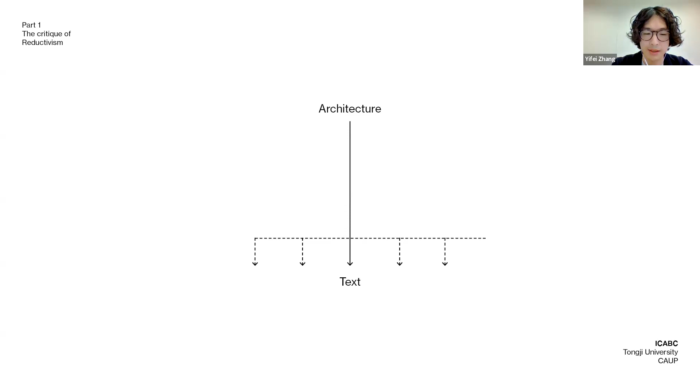If architecture can critique, such criticism must not come only from reading. The emphasis on reading is perhaps symptomatic of we as designers' temptation to explain. Buildings are firstly to be lived rather than to be read, and reading or a prescribed meaning are more than likely the didactic narrative of design, the declared intention. A text demands a writer, and thus to read is to be at least distracted by the master narrative, reducing buildings as footnotes to theories.

This discovery of the insufficiency of biotechnical determinism can be understood as more than just a simple critique of modernism, but a wider critique of textual reductions. Like functionalism cannot lead to a singular design, declared intentions of all kinds—whether formal autonomy, sustainability, or functionalism—cannot singularly account for a built project. The interpreted textual meanings cannot exhaust the totality of the building.

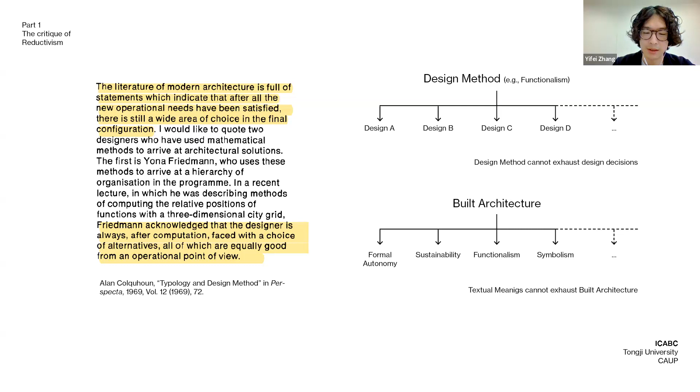Architecture is not only a representation of these ideas. There's always something beyond these declared intentions, and it's particularly what is beyond architecture's message that I argue architecture has proper agency to formulate criticism. The gap between the entirety of architecture and that of its various textual manifestations is where the building, supposedly a mere physical object, serves its agency as built form.

Architecture is condition, but also conditions. So in my presentation, as well as my paper, I explore a form of architecture as criticism that breaks away from the process of reading and focuses on scrutinizing architecture's outward manifestation of power toward its users rather than inculcating architectural literacy inwardly for its readers.

This approach moves away from projecting the designer's intention onto our perception of a building or analysis of drawings, and focuses on the building's effect in shaping its user's life and habit. It is this emphasis on exteriority, on effect, and on the outward manifestation that the stance of this paper is pragmatic.

From this pragmatic understanding of architecture derives my definition of a pragmatic criticism by architecture. To me, architecture can only work as criticism. A building is critical only when it critiques, when it actively renders its object of criticism improper. The power of architecture as criticism thus differs from textual criticism expressed by its author. Textual criticism is the representation of the architect, yet in a pragmatic criticism, the building asserts its own agency.

If the building creates a better quality of life, we can say it is a critique of history, which makes the condition of living prior to its completion improper. Similarly, we can say a built building can critique a type by acting as a parody or an exemplar. And if a building renders the exterior uninhabitable, it can be regarded as a critique of climate or environment. In fact, I will argue a majority of buildings would qualify as this critique.

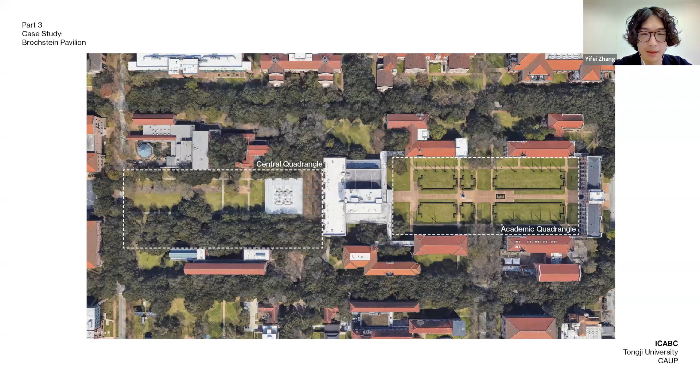Already from this satellite view, you can see the academic quadrangle is poorly shaded and has these kind of formulaic French gardens, while the central quadrangle on the left is populated by trees, and the square you see is the pavilion in the middle. In the scorching sun, there is no shade other than shadows of monuments, architectural or statuesque. The academic quad admonishes loitering and demands veneration—and if you know Houston, it's almost 40 degrees here during the summer.

In the academic quad, the division between solid and void is absolute. The academic quad is picture perfect. It can be appreciated only by its instantaneous visual power, recreated infinitely by promotional materials. The behavior fostered by this academic quad is its popularity among Houstonians photographing for weddings, engagements, and quinceañeras.

The total transparency of Brochstein and its generous canopy blurs the line between the interior and exterior, dissolving architecture's solidity within a leafy landscape. In addition to its glass cladding, the brightness is carried indoors through the angled skylights and the perforated ceiling. Its openness can also be felt in its accessibility. Brochstein's transparency recalls Farnsworth House or the Glass House by Philip Johnson, but it sits on no podium and can be accessed from all four sides.

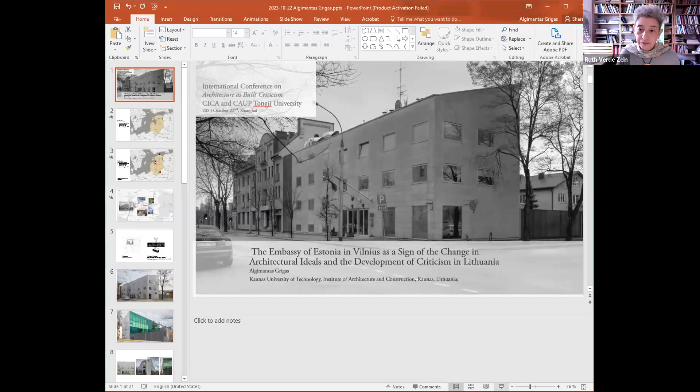Yes. Hello, everybody. I hope you can hear me well and you can see the presentation in full screen.

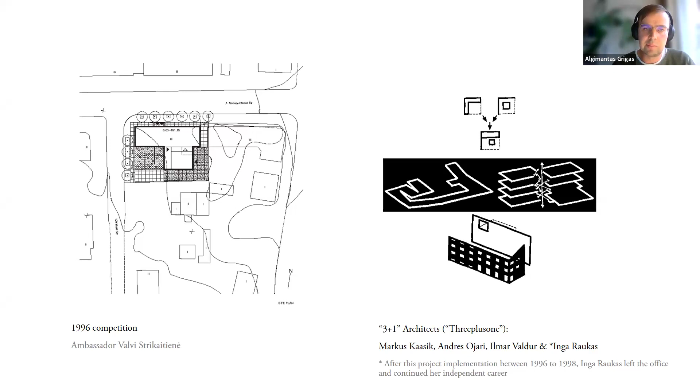The front of the building is decorated in limestone, typical Estonian Ungru stone, which is declared a national stone, lightly painted in light blue by impregnation material. And in the back, we see the first frameless glass wall in the Baltic states.

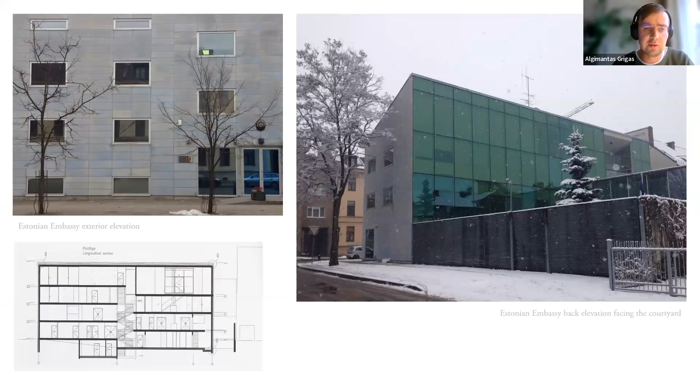A number of technological innovations have been introduced in this building. Here you can see the comparison of the section of the building, which shows the innovative proposal by the architects to design a building without corridors, where each level represents a different space, and the shift in the half floor allows this smart layout of the building.

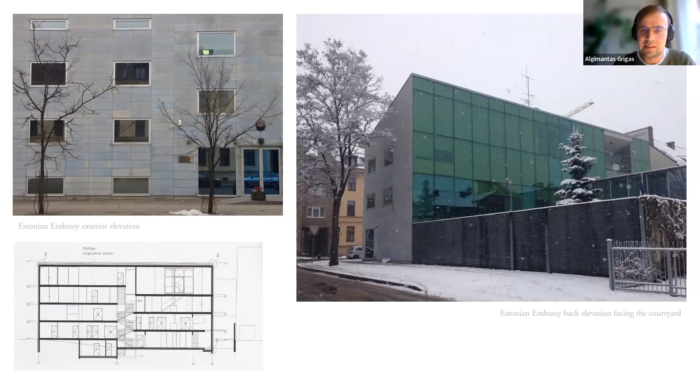On the right side, you can see a picture with some snow. As you may know, black and white are part of the Estonian national flag, so this play with the colors is imminent here.

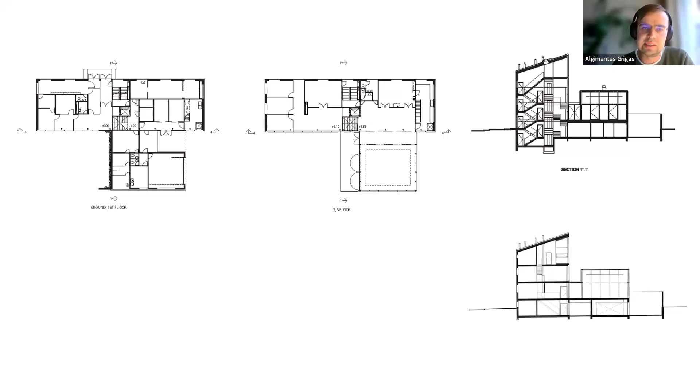With the views of this room, I will end the presentation. And this is the building again from the exterior.

It does not look too old, as Estonian architecture historian Mart Kalm, when he visited the building at a 2010 conference in Vilnius, noted that the building is aging very well. There are not many things that have been changed, and it functions exactly the same way as the architects intended in the beginning.

There was some criticism for the building, of course, like this open balcony you can see in the back elevation. It was covered with a metal curtain, which caused too much noise, and it had to be removed. Also, the big frameless glass wall had to be additionally glued with a sunproof sticker, because during construction, cost saving had been implemented by a political decision, and the wrong type of glass had been used for the back elevation.

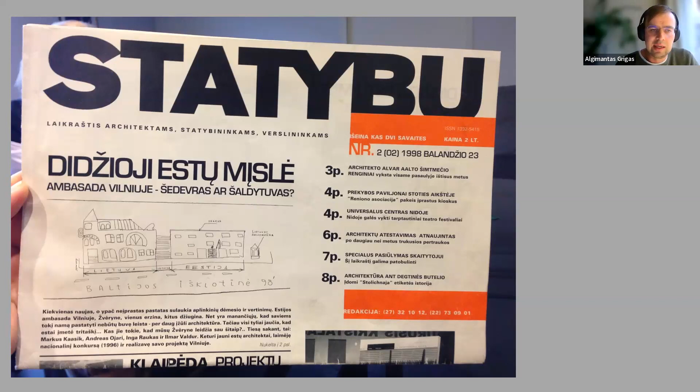caricature of the Estonian embassy with the neighboring building. If we look more closely, we can see that, by an unknown architect, the caricature sums up the story of architecture in the last decade of the 20th century in the Baltic states. We can see Lithuania on the left side, Latvia in the middle, and Estonia as a super modern and striking modern building. Below we have another variation of the caricature, showing the Lithuanians lining up for visas to 'modern European architecture,' as it says.

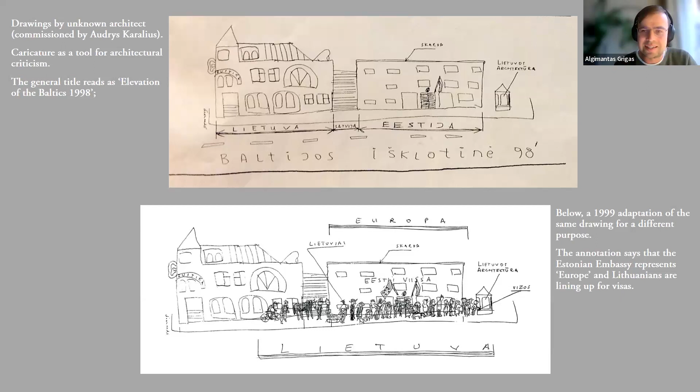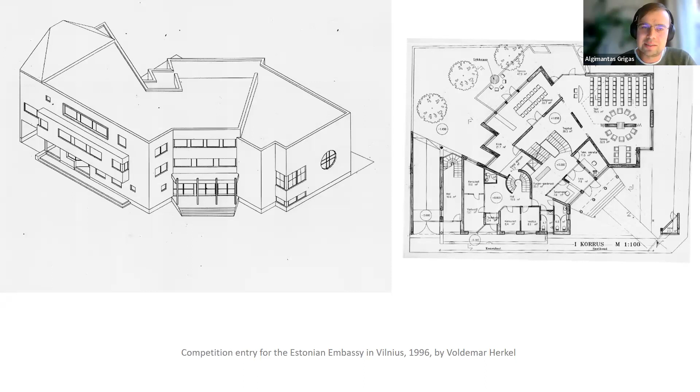But it's really helping me to explain the situation, as these two buildings were built at the same time in completely different styles. When the Estonian embassy appeared, there were many articles in Lithuania with furious titles like 'The Fridge' or 'A Prison', or 'Beasts on 2 feet are destroying the Žvėrynas neighborhood'. But also in Estonian context, this is another entry to the Estonian embassy proposal, a very postmodernist one.

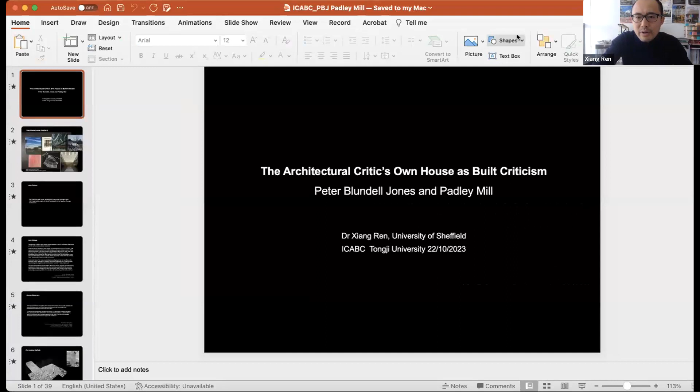Peter Blundell Jones is a prominent British architecture critic and academic. He died early at 67, but in his long teaching career spanning 40 years, including 22 years as professor at Sheffield, he wrote about 15 books, not counting foreign editions, and nearly 600 articles published in 47 journals spread over 13 countries.

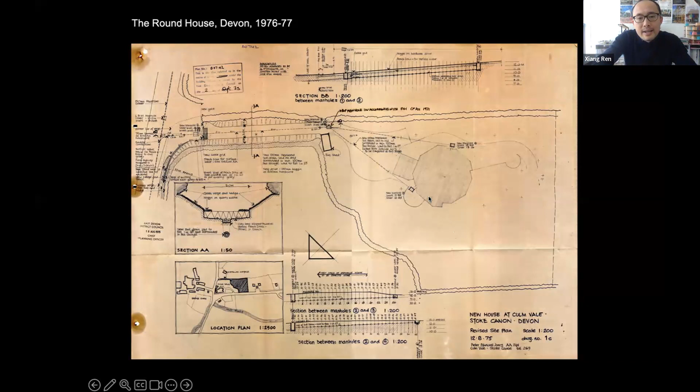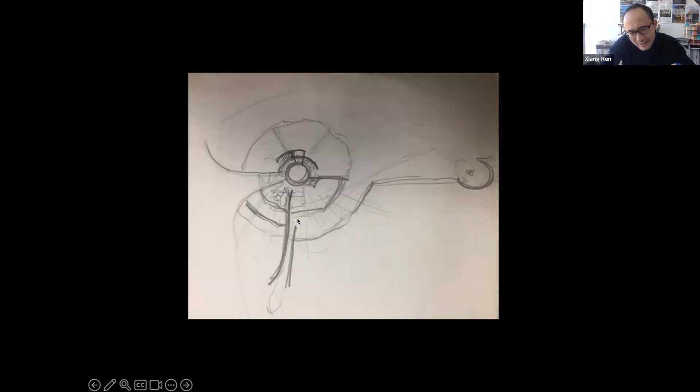You can also see this idea of extended walls into the garden, into the nature, with semi-enclosed, semi-public space here and there—some for car parks, some for the garden, some for channels and the ramp around—and they all come together, blurring the boundary between interior and exterior.

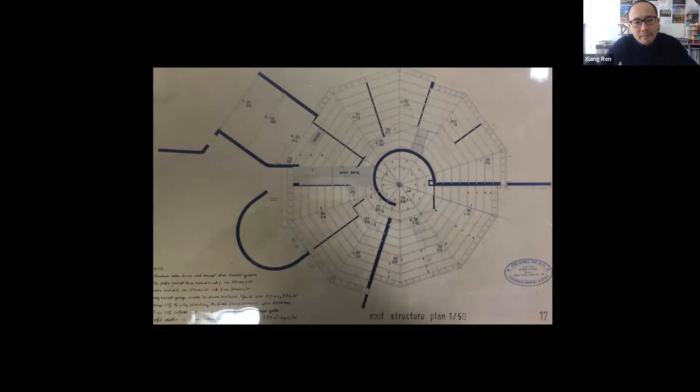It is built and flexible, I believe. He participated in the construction himself, always working with the masons and subcontractors, and kept the cost very, very low at that time. I think the full cost of this project was only 30K at the time.

As built, you can see very lightly, gently curved partition walls, expanding the building into the external, but also always having a window frame bringing the view from inside to outside, articulated at different levels of the roof, bringing daylight from the top and the high side.

This is the main space of arrival, channeling you into a central welcoming space. This is the heart, the hearth of the family life, with the fireplace built into this wall, and the long built-in sofas alongside—always in a circular and organic relationship with the objects.

You can see the roof ceilings, exposed structures that remind of the works of Aalto in the town hall. Always these different ideas and languages are being synthesized and reconciled on this specific site for the specific clients, by Peter Blundell Jones.

This is his very first ever built project, and it won some small awards and was published in a building design magazine in 1977, a year after its completion. You can see that it's inspired by Hans Scharoun, and it's one of the circular houses in the country at that time.

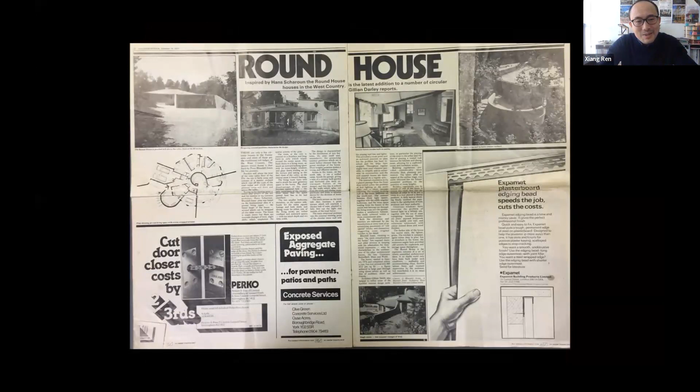So the central idea of the family house, centered by a fireplace but also the hearth, the living room as a core to organize the ritual of daily life.

This is the fundamental methodology and thinking Peter Blundell Jones translated twenty years later near Sheffield, in a small village called Grindleford, where he bought a decayed 18th century industrial mill from auction and reused it into his family house, which he lived in until this year with his family.

This is the site from the ordnance survey, and these are the moments and as-found objects from the site. That is the house from a distance. By the way, this is a conservation area, and the house is a listed building.

So lots of the interventions are happening inside.

Excuse me, one minute please. Sorry, excuse me, one minute please. All right, no problem, I will be very quick. Yes, it's all very general.

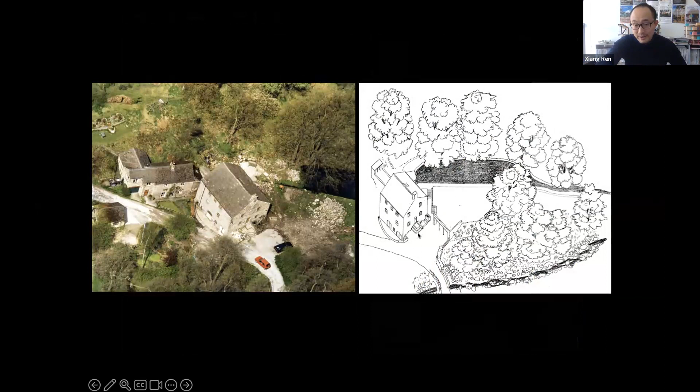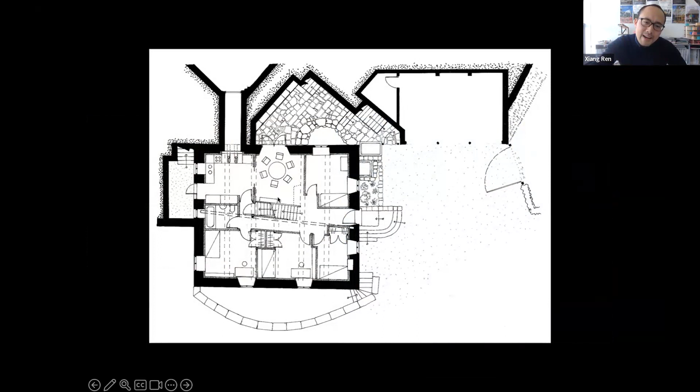And the plan—you can see a spiraling screw of stairs leading centrally to the living room and the kitchen, which is a key idea of the plan layout. Here you can see a new steel structure intervention into the existing shell.

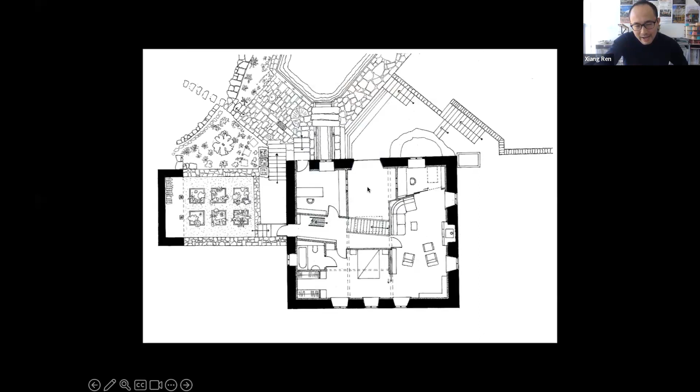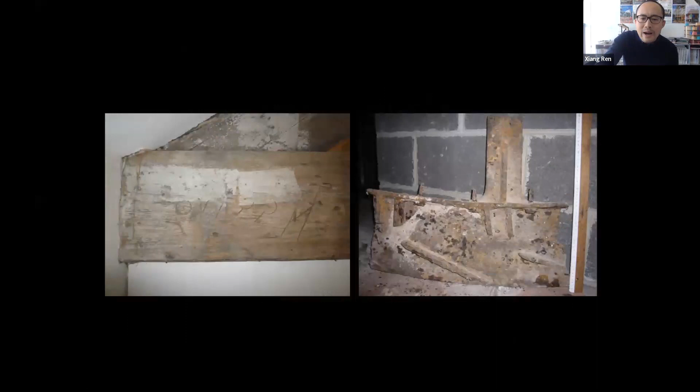These detailings are seen a lot in Scandinavian traditions too. So I want to finish with these slides, a little bit in a rush, on the home and the wall and the built criticism, following his idea of architecture and rituals: that architecture provides a mirror that reflects our world and our knowledge about it, and it's the way we interact with it.

And in David Lee's obituary for Peter Blundell-Jones, I think that is his feeling, but also a lot of our feelings: that the threads of life connecting me to a bright, optimist view of the world in which architecture as an outward form of a well-ordered society could make a profound and positive difference to people's lives are being cut one by one. Hopefully this clarity of vision from Peter Blundell-Jones can all continue as a collective legacy. Thank you very much.

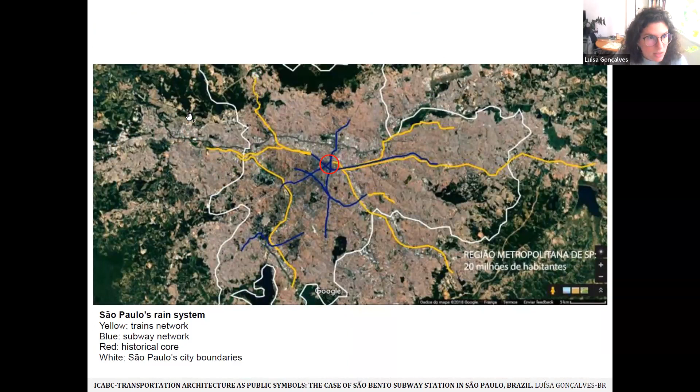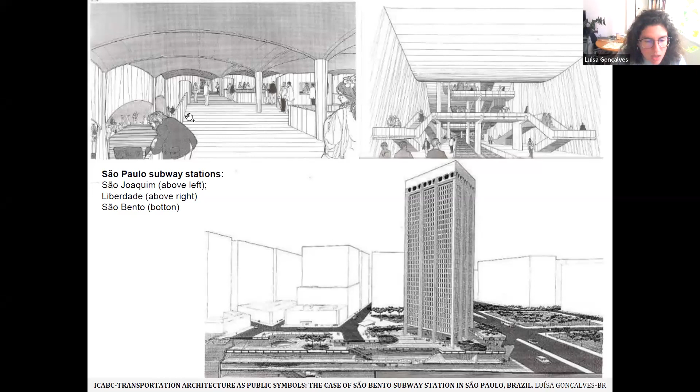Subway stations are primarily designed for their functional aspects as transportation nodes. They gather a large number of people passing by, especially in connection stations and intermodal terminals. They also present numerous interesting opportunities, defining places for public encounters and further city engagement, as is the case of the São Bento station, located in the historical core of the city of São Paulo in Brazil. The station design was the responsibility of architect Marcelo Fragelli and his team, developed when designing the very first subway line in Brazil. It has been considered a significant modern and brutalist architectural landmark for its historical and cultural value.

Fragelli's work presents several aspects that point to architecture as built criticism. That happens by turning the stations not only into places for transit, but into public spaces, some of them configuring major squares. Fragelli and his team opened the stations from its interior out, frequently bringing natural light to the underground spaces, integrating gardens and fixed furniture, allowing people a more pleasant and metropolitan spatial experience. Line 1 Blue stations are also statements encouraging a deeper appreciation of the potential of transportation architecture to shape the public realm and foster critical conversations about the built environment's role in society.

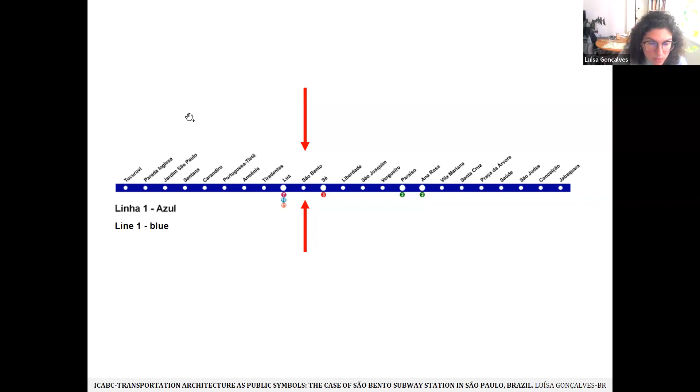São Bento station is in the middle point of Line 1 Blue of the São Paulo metro system. It is located near several important foundational landmarks, such as a valley called Anhangabaú, an indigenous name for the small river that crossed that area, also the São Bento Monastery, and a major square called Sé, which refers to the Catholic Archbishopric, in the central area of São Paulo.

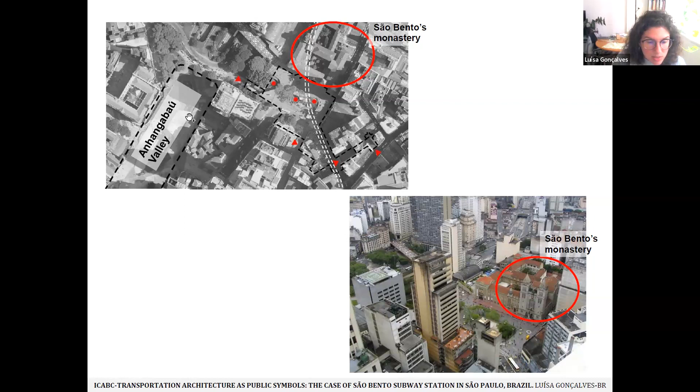It is one of the 23 stations of Line 1 Blue, and an estimated 40,000 people use its premises at rush hour. In the 1980s, it hosted the city's initial slam and hip-hop gathering until the movement outgrew the space and moved to bigger ones. In 2019, the subway company licensed the station to a shopping mall company called Patio to establish a commercial area inside it, a future that was already planned by its initial design.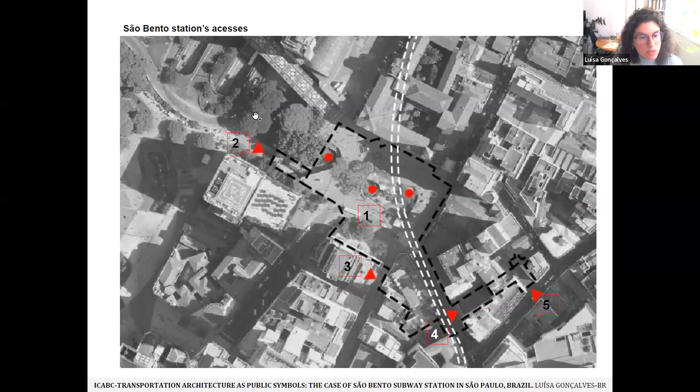Despite serving only one metro line, the station has 5 different accesses due to its unique position in the city. The foundational core of the city is over a small triangular hill, surrounded and limited by 3 valleys, where each corner corresponds to a different religious order premises: the Benedictines, the Franciscans, and the Jesuits. Even though São Bento Station's main entrance is in the plaza in front of the Benedictines monastery, it may be discreetly accessed by the surrounding streets. Every entrance is at a different topographical level, giving the station a particular characteristic of being a possible pedestrian shortcut connection through the irregular and steep immediate surroundings.

The main plaza access is a large multi-level square defining a significant excavated architectural space surrounded by a perimeter wall that may be used as a balcony to look below, revealing the metro entrance, and creating a sunken plaza surrounded by small shops and cafes.

All the architectural elements were carefully designed. The main stairs define a monumental spiral in dialogue with round-shaped gardens, offering the passing public a gradual transition between the upper street level and the underground station.

The sunken plaza solution allows its monumentality without visually competing with the surrounding historic monuments. Also, it is organized in plateaus filled with gorgeous benches and different opportunities to sit and enjoy the place, the small bars and other commercial establishments.

After the plaza, we find the standard architecture of the subway, with signalization conducting the public to the ticket offices, stairs, escalators, trains, and rails.

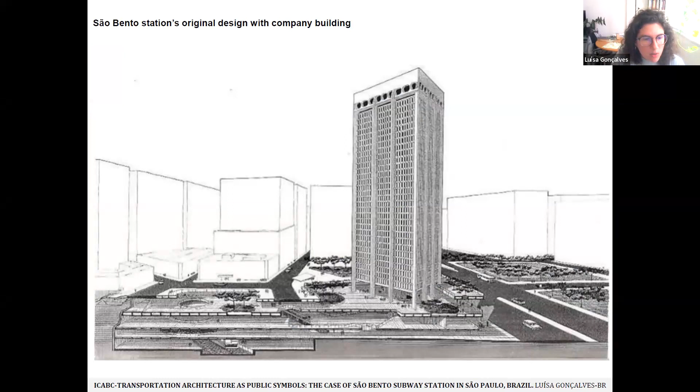It is interesting to highlight that the original design proposed a much bigger square, as the metro company intended to build its headquarters there, facing the Anhangabaú Valley. Ultimately, this part of the design was deferred for financial reasons and due to its historical environmental protection directive.

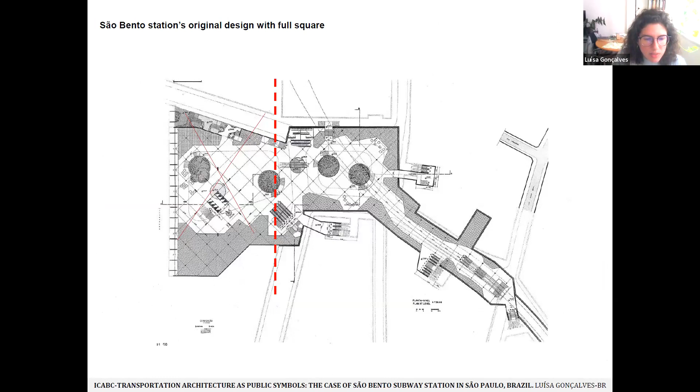The other São Bento station accesses show an opposite design strategy. There are small entrances camouflaged in the urban landscape of the block's facade, posing like regular buildings but sheltering escalators and gates to enter the subway system.

Although small, they show the same architectural features of the main square. They are built with apparent concrete walls illuminated by ceiling openings, allowing the entrance of natural light, and sometimes also have corners, a vocabulary that encompasses Marcelo Fragelli and the team leader architect's understanding of what valuable architecture for public and collective use should be.

Fragelli studied in Rio de Janeiro in the 1950s, a period of strong enthusiasm for modern Brazilian architecture. After practicing in Rio for some years, he transferred to São Paulo and became a key figure in the development of its first subway line, the first one in Brazil, which opened in 1974.

At that moment, São Paulo urbanization had already extended into a huge metropolitan area. Throughout the state of São Paulo and the country, transportation infrastructure and urban mobility issues were being enhanced with the design participation of several important architects.

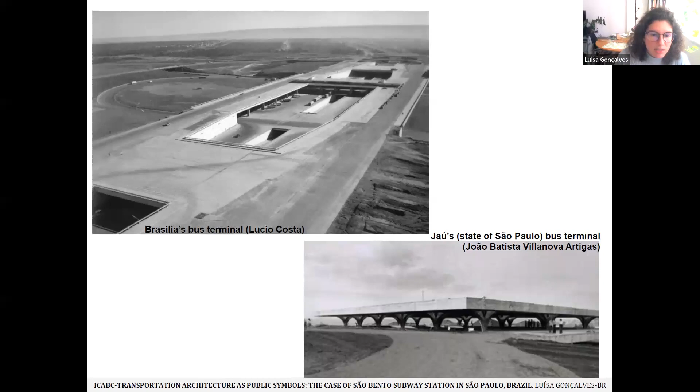The infrastructure architecture of that period was producing spaces for collective use that had aspects of monumentality, in close dialogue between structural engineers and the architectural team. They were able to elevate the transportation infrastructure features into architecture and urban landmarks.

It was experimental work, so Fragelli and his team felt the need to establish a set of principles to be applied. The station's composition should be in dialogue with the structural elements, displaying the true nature of each material, not only as a plastic choice, but also as a philosophical stance that would, in his opinion, better define the public characteristic of the internal and external spaces.

It was deemed inappropriate to cover the concrete elements, ceilings, pillars, and beams, as they were not understood as a regular interior space, but instead as the underground guts of the city itself, where the sustaining walls should show the force of grand scale.

Another principle was to allow natural light to enter as much as possible in the underground levels of the station. That would allow passengers to directly relate to the time of day and would soften the claustrophobic effect of the underground situation. Fragelli had visited the subway systems of some European cities and considered the long corridors connecting interior spaces faulty, something to be avoided.

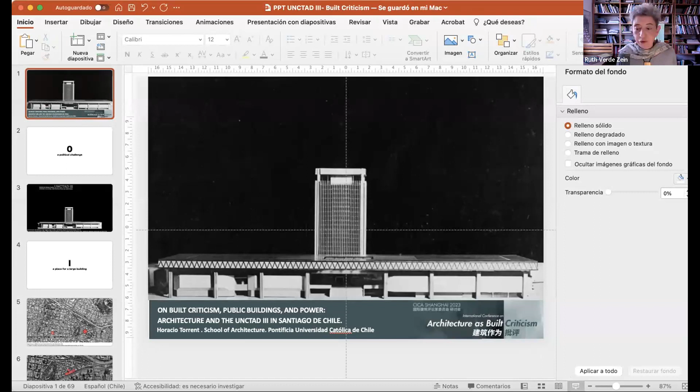Horacio Torrent is professor at the Pontifical University of Chile. He was an architect from the National University of Rosario. He is a member of Docomomo and will be chairing the next Docomomo conference in Chile, in Santiago de Chile, next December 2024. I'm sorry, I'm not finding your curriculum, but he is very well known, a very good critic, and has a lot of books and texts published. He's going to talk about built criticism, public buildings and power, architecture, and the UNCTAD 3 in Santiago de Chile.

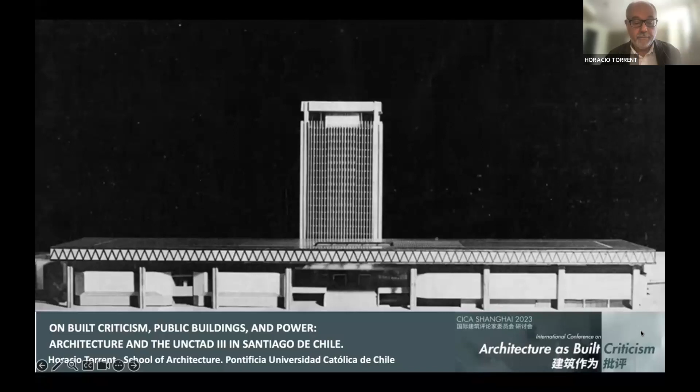The complex for UNCTAD 3, the United Nations Conference on Trade and Development, was built in Santiago de Chile in 1972. The organization of the conference in Chile was a proposal from President Frei, and when accepted, was faced by President Allende.

The conference was the third of a new institutional effort of the United Nations organization facing the challenge of development. In Chile it was promoted by Felipe Herrera, a Chilean economist who would be a prominent official of the international order for many years.

The political challenge lies in holding the conference for what would be known as the Chilean way to socialism that the government of Salvador Allende was facing at the time.

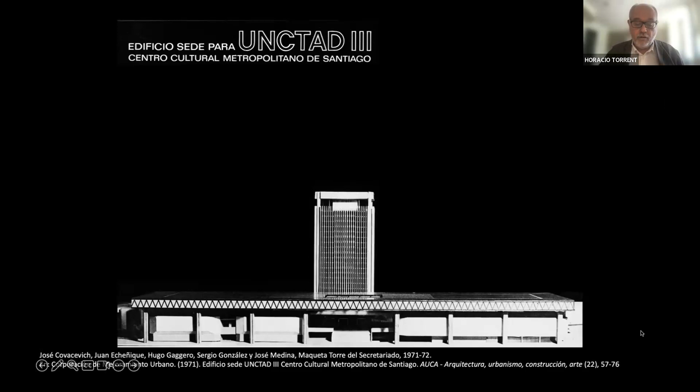And this implied both facing the organizational aspects of the conference and the construction of the space for the conference, that Chile did not have until that time.

There was no building capable of hosting a conference of that size, nor were there many options to locate a new building in a significant location in Santiago.

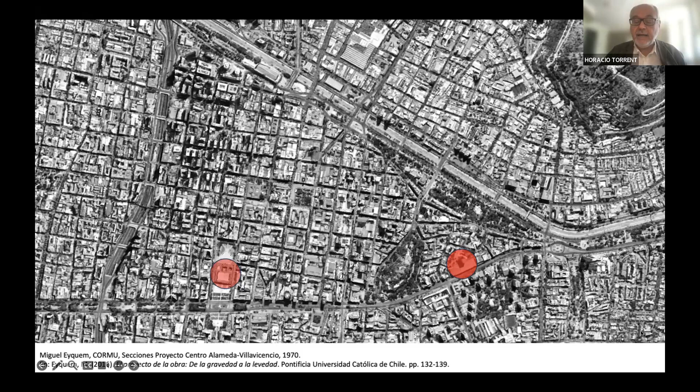The place finally chosen would be in an area still available in the great urban intervention, or urban renewal intervention, known as San Borja, close to the city center and La Moneda Palace, the presidential palace, which are marked here.

It was an urban renewal program, begun under the Frei Montalva government by the Corporación de Mejoramiento Urbano, CORMU, which, after the demolition of an old hospital, included the construction of 23 towers and a large area for residences, a large park, and a cultural and commercial center.

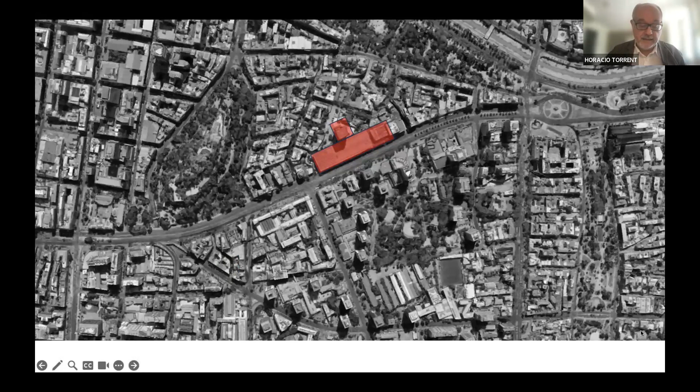Here are the photo montage of the urban renewal and the plan, and the area I'm marking here was this area, along the main way of the city, the Alameda.

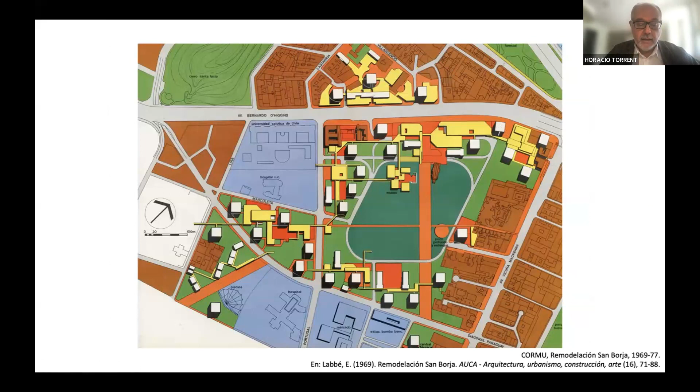But the building complex also had to be completed in an extremely short term. The conference was scheduled for April 1972, and the Allende presidential period began in November 1970. That means 18 months for design and construction.

The main idea was to make a large roof that would eliminate the possibility of construction delays due to climatic reasons, and continue building, under the roof, the main rooms for the conference.

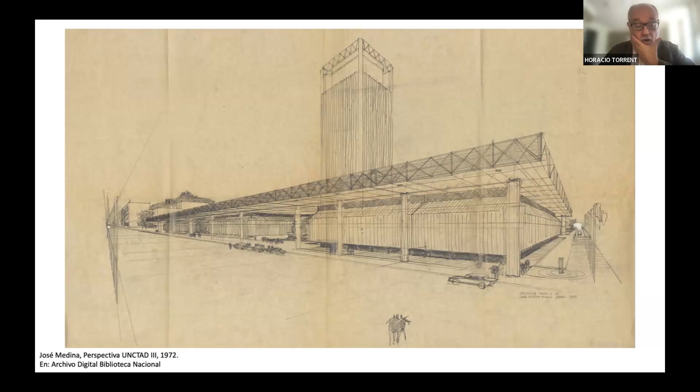The design comprised a tower 70 meters high and a horizontal megastructure 180 meters long, supported by 16 monumental columns.

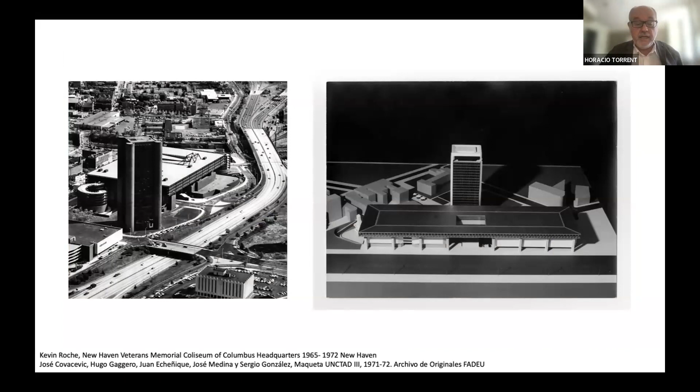It was designed by the architects José Covacevic, Hugo Gaggero, Juan Echenique, José Medina, and Sergio González, under the idea of José 'Pepe' Medina, who was collaborating at the time at the Kevin Roche and John Dinkeloo office for the construction of the New Haven Coliseum of the Knights of Columbus headquarters, and had returned to Chile at that time.

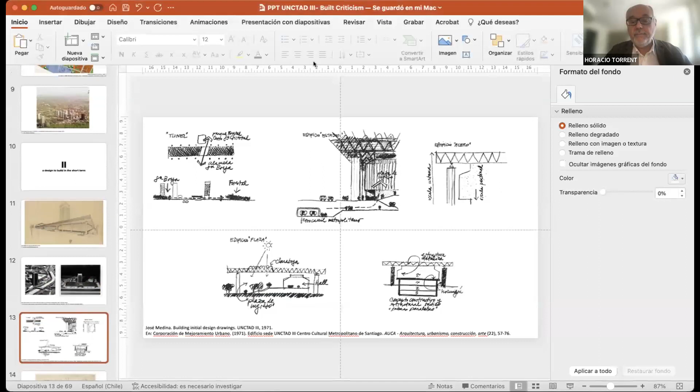As you can see, the main idea was the high roof supported by the monumental columns, in which resides the relation with the urban scale of the building.

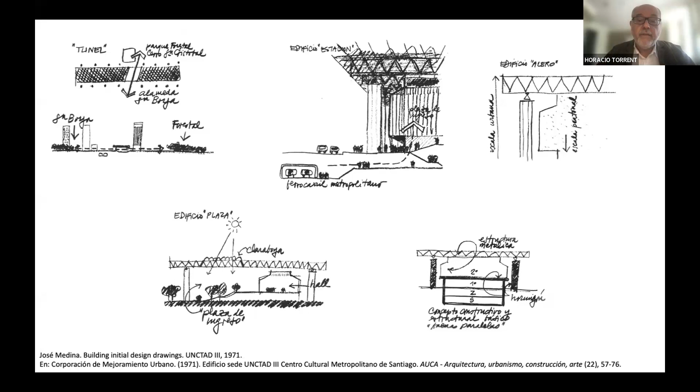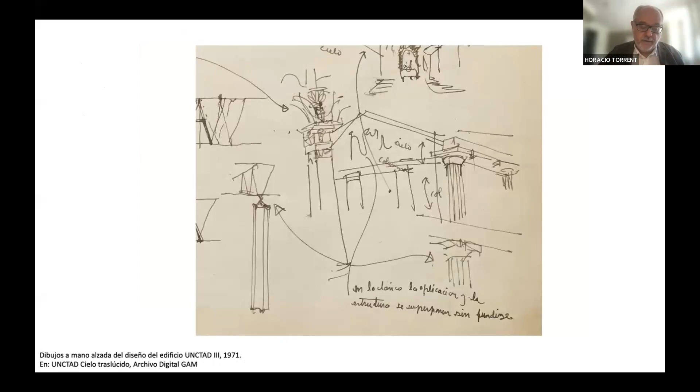The columns in the center were the focus of the architectural reflective approach for this building. The columns were in charge of giving the building its monumental scale, related to the institutional significance required to accommodate an international conference.

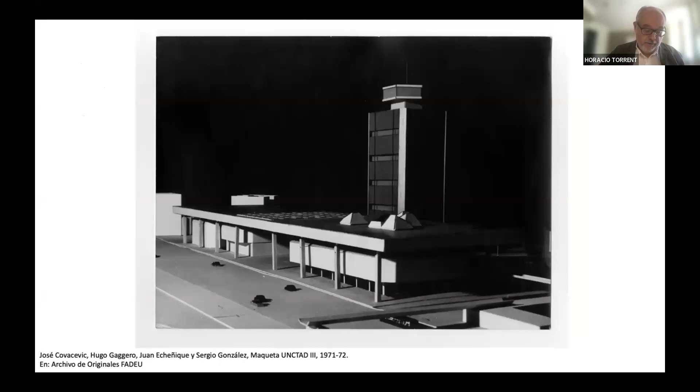The entrance was also another part that assumed public status and significance.

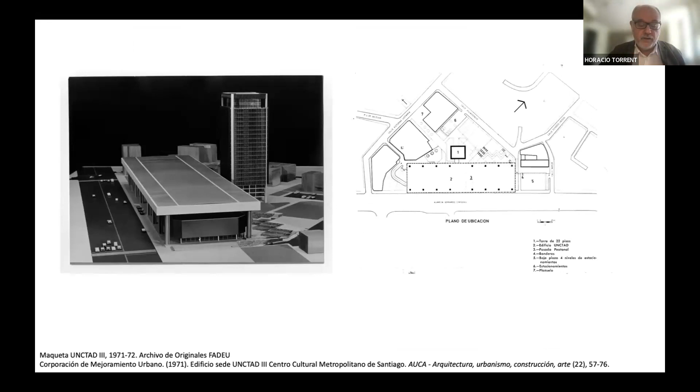The building includes the tower for the secretariat and the horizontal structure for the main rooms of the conference, with a basement dedicated to serving the delegates' needs. In the plans of the horizontal building, you can see the main rooms at the right and two others at the left.

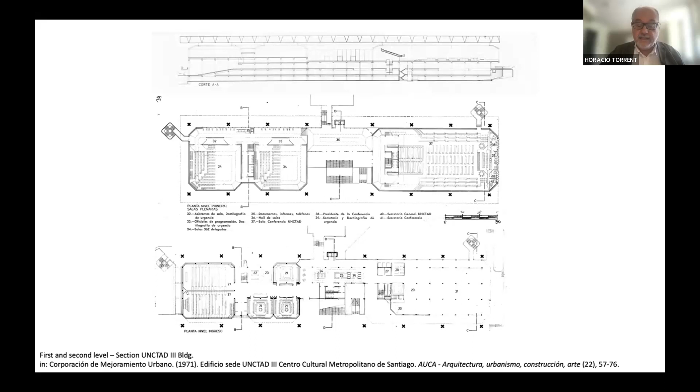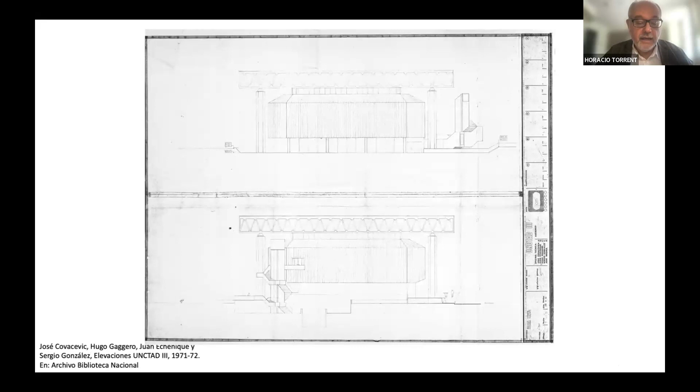And the access entrance in the center with the great stairs. The section is clear in the organization of the different levels. The drawings reveal that the orders of columns were completely exposed, and the rooms were inside the horizontal roof.

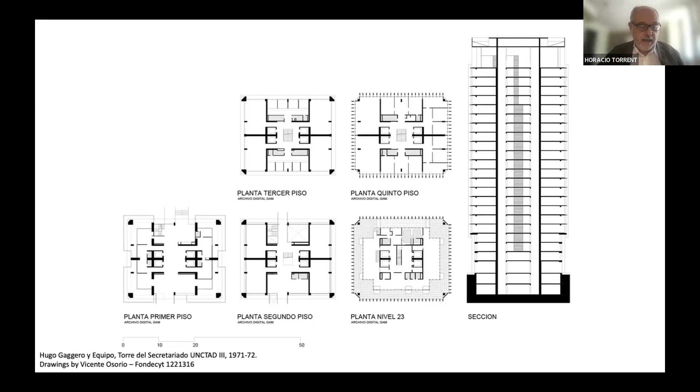On the first floor basement were the services for the delegates, the journalists, and the translators. The tower, in fact, repeated the plan of the residential towers from the San Borja urban renewal, because the know-how for the construction already existed and needed to be quick and efficient.

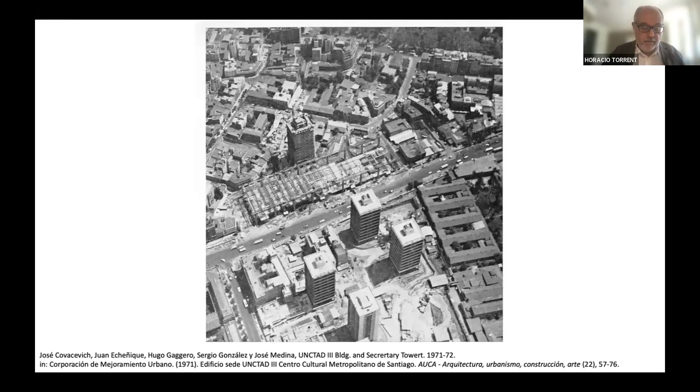As I already mentioned, the construction was a tremendous challenge. The main structure was built in concrete and Corten steel. The building process started in 1971 and finished on April 3, 1972, a few days before the inauguration, and it was considered successful, completing 275 days of construction. The main milestone of the process was when the steel roof truss was installed.

There was a popular ceremony celebrating that moment, as has always been done in Chile when the roof of a house is complete. It's called Tijerales, and it took place in October 1971 — a large open-air lunch for the workers and their families, accompanied by the president, his wife, and the entire government.

Renowned artists made works of art for the buildings, in a wonderful exercise of synthesis of art and architecture. The artworks were everywhere, from the halls to the walls of the main rooms, from the lamps to the doors. One of the main artworks was the stained glass installed on the ceiling above the entrance, by Juan Bernal Ponce, named Volantín, which means kite.

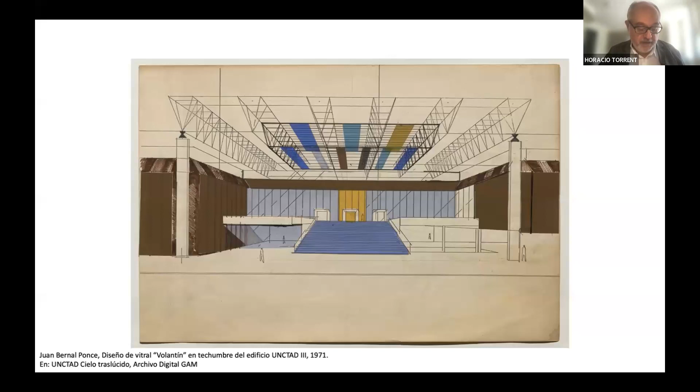On April 3, 1972, Salvador Allende, President of Chile, and Kurt Waldheim, Secretary General of the United Nations, made statements at the inaugural ceremony of the 3rd session of the United Nations Conference on Trade and Development. The building was complete, showing national pride in having successfully completed one of the greatest challenges of the new era that meant the Chilean way to socialism.

The popular consecration came at the end of the conference, when the building became the Metropolitan Cultural Center, named Gabriela Mistral, honoring the first literary Nobel Prize of a Chilean poet. But mainly, a restaurant for the delegation located in the basement became a popular dining room for 600 people per shift, serving around 2,000 lunches every day, and also became the place for demonstrations supporting Allende's government when things got difficult.

But as is very well known, on September 11, 1973, came the coup and the bombing and destruction of La Moneda Palace, the presidential palace and traditional seat of power. Because of the destruction related to the bombing, the military board that took power had no facilities, so the UNCTAD building was occupied, and a process of new signification began.

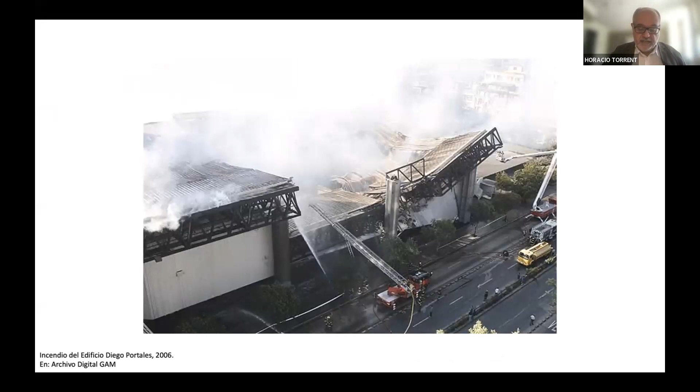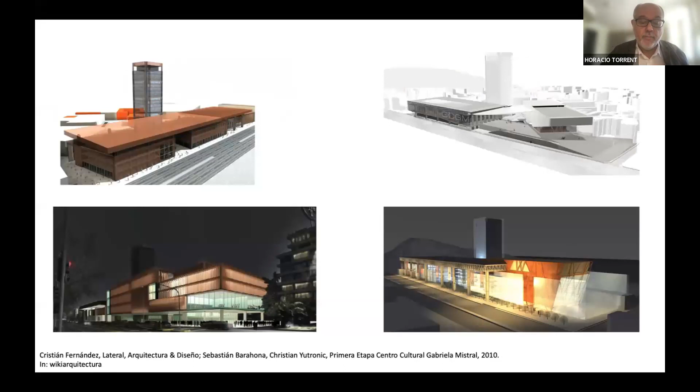Occupied by the Ministry of Defense since the return of democracy, an opportunity to change the signification came with the building fire in March 2006. The destruction of part of the building prompted the Bachelet government to call for an international architectural competition in 2007. The winner was the design led by Cristián Fernández Eizaguirre, Sebastián Barahona, and Christian Yutronic.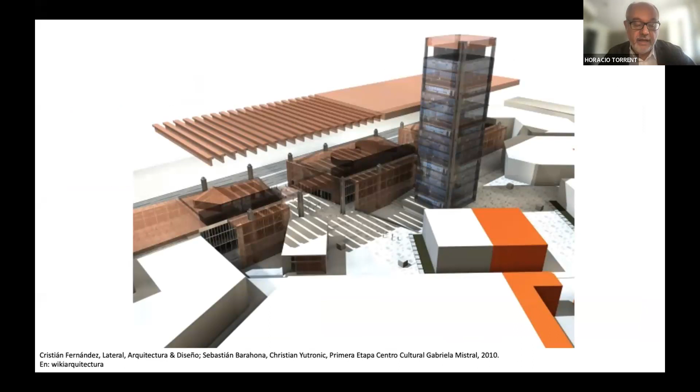The design converted the old building through adaptive reuse for cultural facilities. Among many other aspects, which I will not explain here, two of the main changes came with the disappearance of the staircase, making it possible to enter directly at the level of the urban ground, and the second, and probably the most important in the resignification of the building, came with the new treatment of the columns.

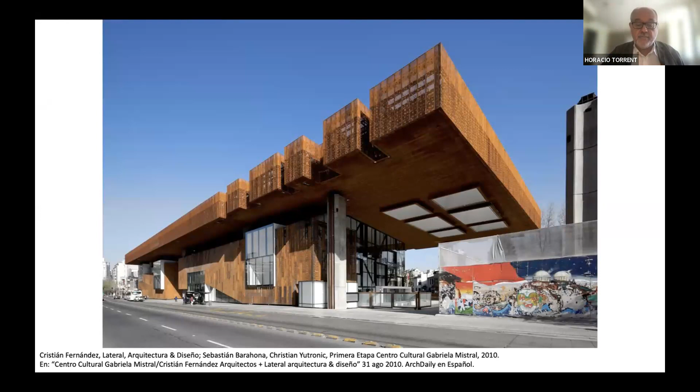The surface proposed for the facade wrapped the columns in a kind of skirt, lowering their height and altering the proportions of the main urban facade. The new Gabriela Mistral Cultural Center was finally inaugurated in 2010, and since then has become the most important cultural facility of the country.

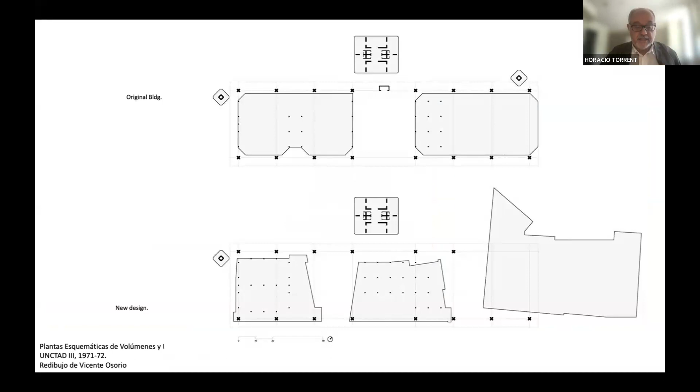During its historical time, the formal characteristics of the building were helpful in different political, social, and even ideological ways. The last architectural design and adaptive reuse of the structures assumed the critical readings promoted by the building in its vicissitudes, and changed its qualities by operating the historical imagination deployed around its architecture. As built criticism, the new design successfully transformed the meanings established through history.

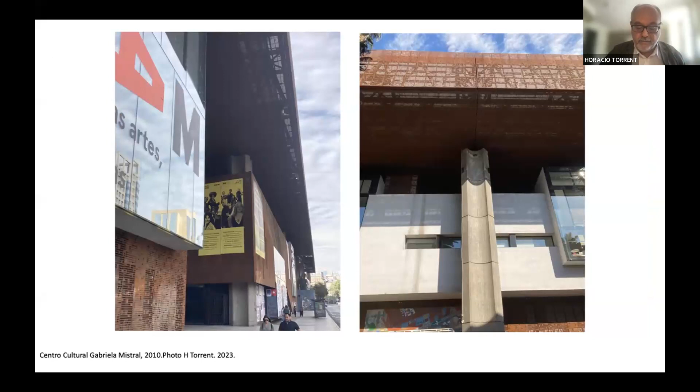A new scale, assigned by new full access at the city level and by the fact of wrapping the columns by the new facade surface, came from a clear reading of the vicissitude of the building in a clear exercise of built criticism. Thank you.

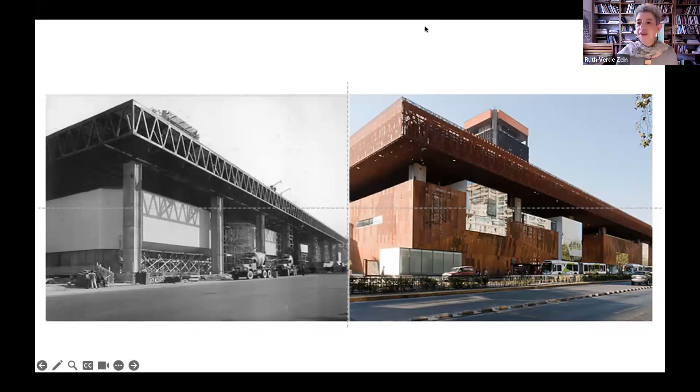Thank you, Horacio, just in time. Would you please share? Okay, wonderful. João, some questions. João has raised his hand.

Yes, please, João. I would just like to know what is your opinion, Horacio, on the finishings of the renovation, because when I visit this building, for me it's really impressive, the form and the scale. It's really monumental. I don't know the name of the street, but there's a small street behind the building where you come from the neighborhood and you just see the roof floating, and it's very impactful and monumental.

But when I reached the building itself, I thought the metal screens chosen as finishing were kind of vulgar. I felt the same thing when I visited the municipal market, the new one with those inverted pyramid roofs. I think these metallic covers kind of took away the monumentality of the structure.

Okay, thank you for your question. I think all the efforts of the new design were put on the surface of the facade. Actually, on the old building all the columns were exposed, and in the new one the surface is limiting the powerful proportion of the columns, because you cannot realize that there are columns behind the surface, only by seeing the little pores of the metal surface.